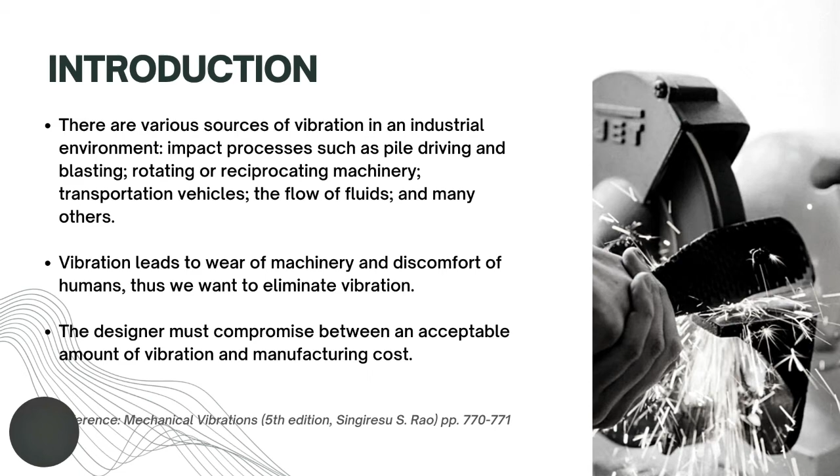Vibration analysis and control is the design or modification of a system to suppress unwanted vibrations and to reduce force or motion transmission. So ito yung pagdi-design or pagmamodifika ng system upang mabawasan or ma-dissipate yung mga vibrations and mabawasan yung mga outside or external forces and motion transmission.

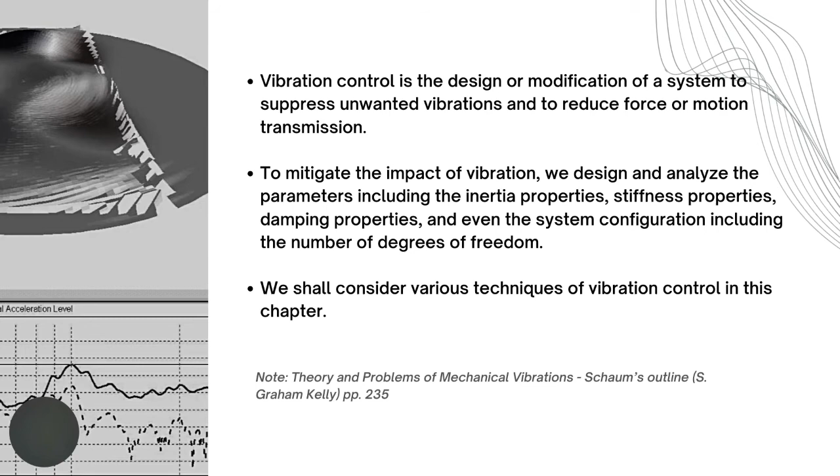To mitigate the impact of vibration, we design and analyze the parameters, including the inertia properties, stiffness properties, damping properties, and even the system configuration, including the number of degrees of freedom. So, in this chapter, we shall consider various techniques of vibration control.

Vibration nomograph and vibration criteria. So, when we say nomograph, it is the diagram representing the relations between 3 or more variable quantities by means of a number of scales. So, the vibration nomograph displays the variation of displacement, velocity, and acceleration amplitudes with respect to the frequency of the vibration.

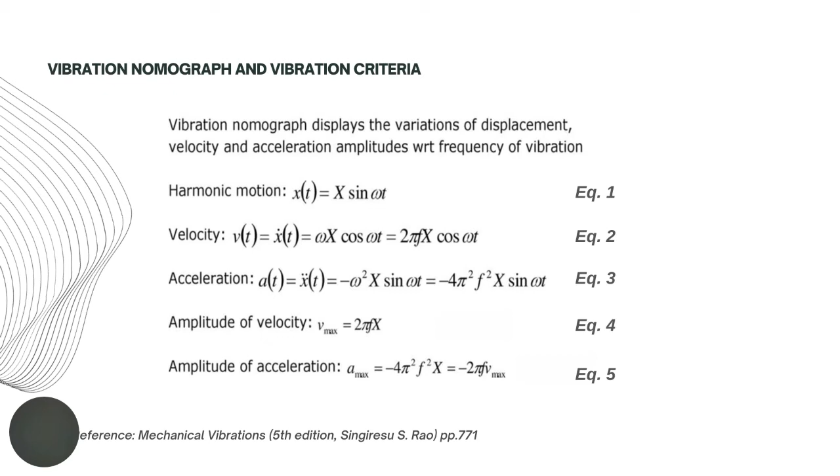So, here we have the harmonic motion, equation 1, the velocity, equation 2, the formula for acceleration, equation 3, and the equation for the amplitude of velocity, Vmax equals 2 pi times frequency times the amplitude. And the equation for the amplitude of acceleration, Amax equals negative 2 pi times frequency times Vmax.

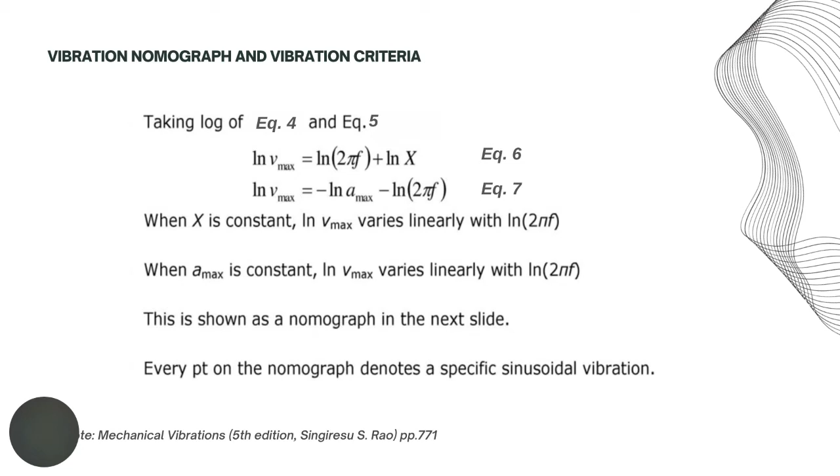Taking the logarithm of equation 4 and equation 5 by the use of the quotient rule and product rule, we can obtain equation 6 and equation 7. From that, when x is constant, ln Vmax varies linearly with ln 2 pi f. Same lang sa amplitude of acceleration. Kapag constant siya, ln Vmax still varies linearly with ln 2 pi f. This is shown as a nomograph in the next slide. And thus, every point on the nomograph denotes a specific sinusoidal vibration.

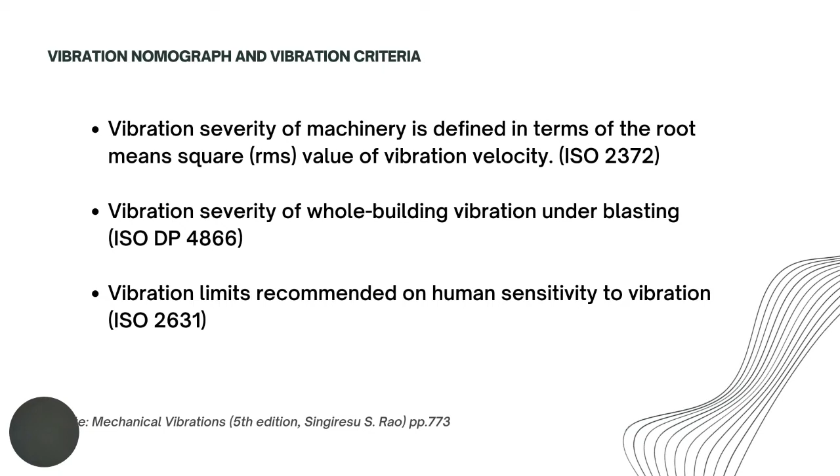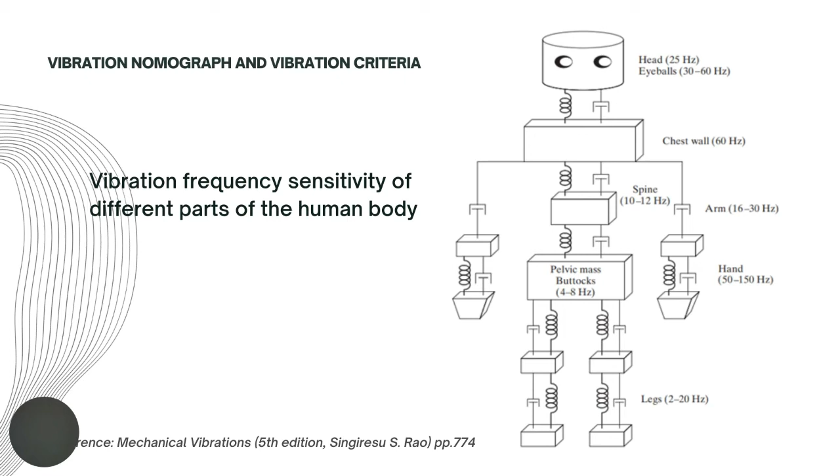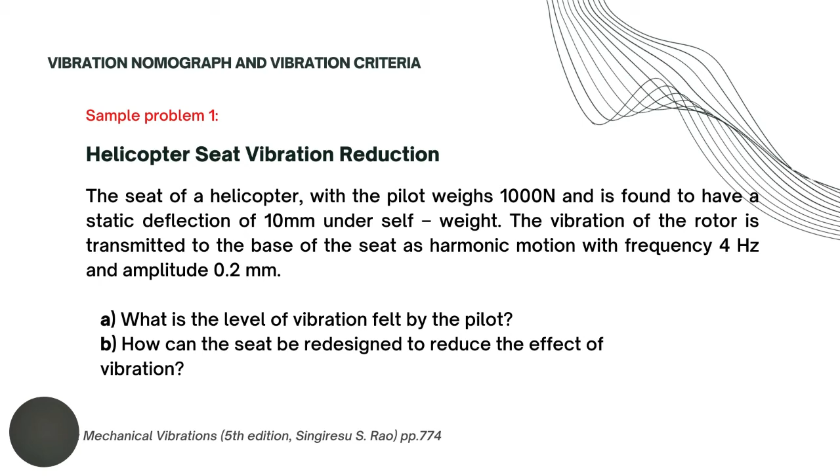So we have a sample problem here, helicopter seat vibration reduction. The seat of a helicopter with the pilot weighs 1,000 Newton and it is found to have a static deflection of 10 mm under self-weight. The vibration of the rotor is transmitted to the base of the seat as harmonic motion with frequency 4 Hz and amplitude of 0.2 mm. So we need to determine what is the level of vibration felt by the pilot and how can the seat be redesigned to reduce the effect of vibration.

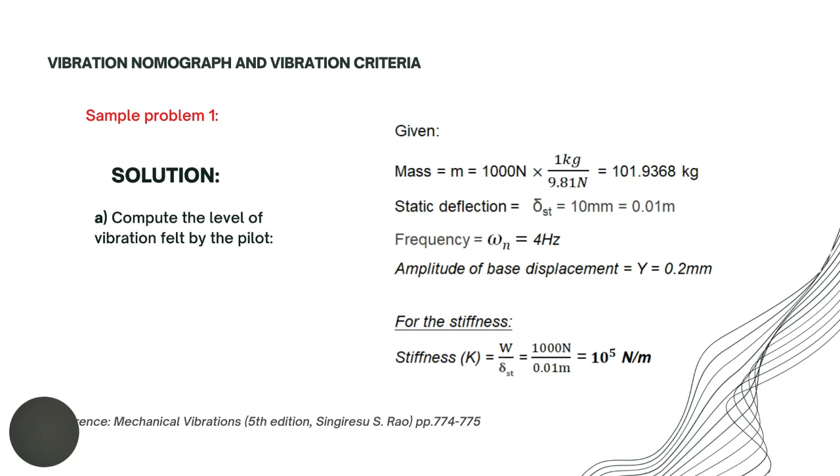So first, for the computation of the level of vibration felt by the pilot, we list the given. We have the mass, static deflection, frequency, amplitude of base displacement, and we compute for the stiffness using this formula, and we get 10 raised to 5 Newton per meter. And for the natural frequency, we use this formula, the square root of k, or stiffness, divided by m, divided by 2 pi. So substitute, then manipulation of units, we obtain 4.9849 cycles per second, or hertz.

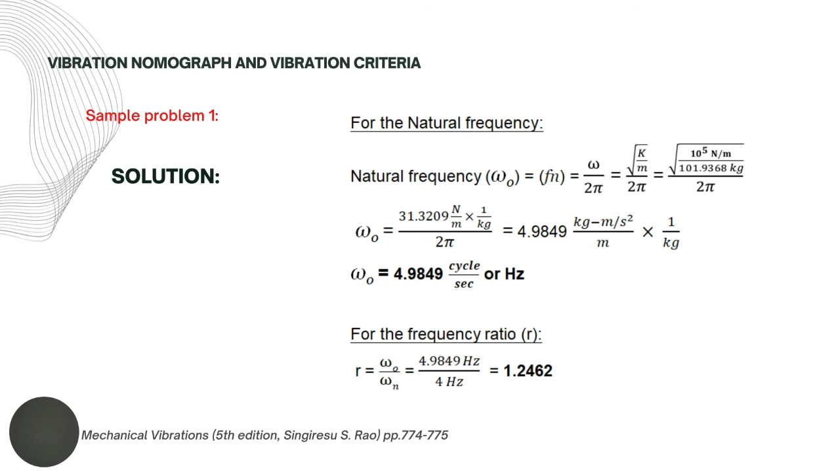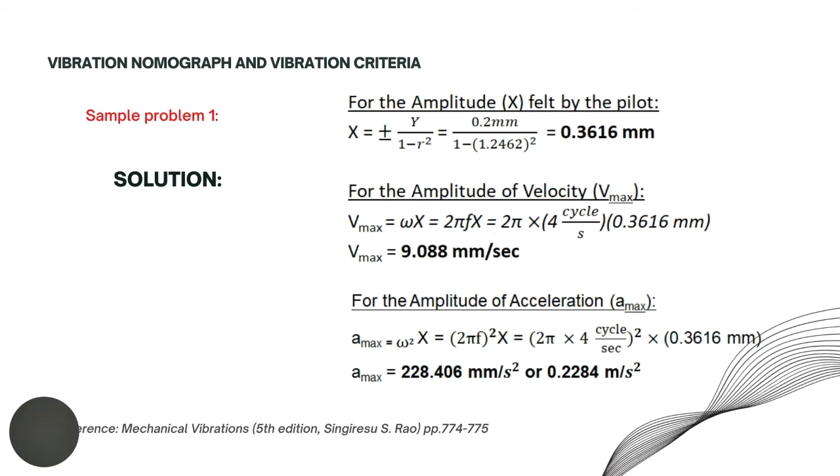And for the frequency ratio, we just divide the natural frequency over the excitation frequency, and we get 1.2462. So for the amplitude felt by the pilot, we use this formula, and we obtain 0.3616 millimeter. For the amplitude of velocity, we use the formula I tackled a while ago, and obtain 9.088 millimeter per second. And for the amplitude of acceleration, we use the formula 2 pi f squared times the amplitude, so we get 0.2284 meter per second squared.

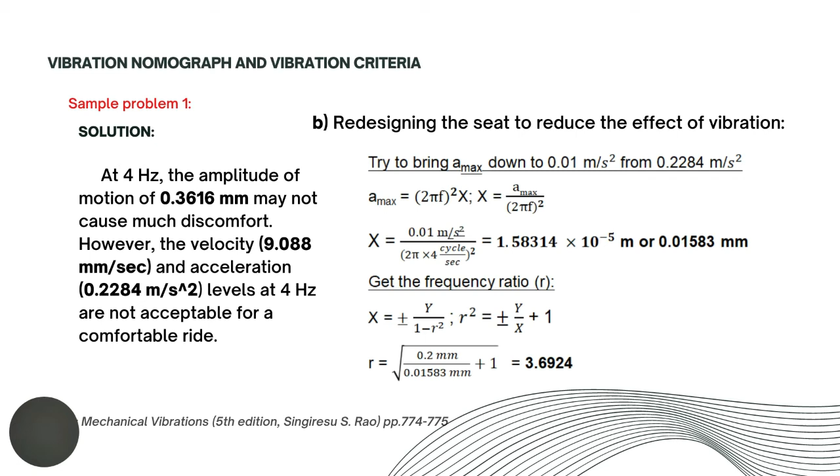So from that, we compute for the new amplitude. We get 0.01583 millimeter. Then get the frequency ratio. So we solve 3.6924. And for that, we can now solve for the new frequency of the seat using this formula. Then we solve for 6.8066 rad per second. For that, we can solve for the stiffness. K is equal to natural frequency squared times mass.

Then we obtain 4,772.71 Newton per meter. So therefore, this implies that the stiffness of the seat needs to be reduced from 10 raised to 5 Newton per meter to about 4,772 Newton per meter. Diba? Ang laki ng pagitan nila. To be acceptable for a comfortable ride, by using a softer material or by using a different spring design.

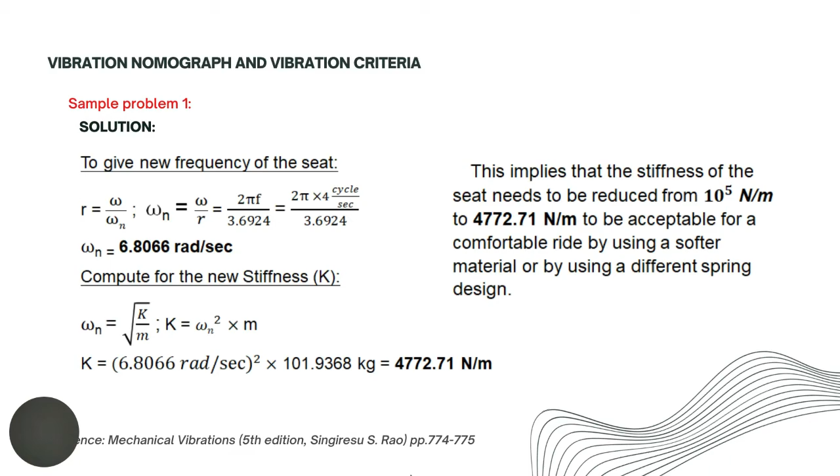Reduction of vibration at the source. The first thing you need to do to control vibration is to try to alter the source so that it produces less vibration. So, syempre, sa unang-una, kailangan mo malaman yung source ng vibration. Kung saan siya nanggagaling, kung saan nag-umpisa. In order for you to fix it or to alter it.

Some examples of the sources of vibration that cannot be altered are the earthquake excitation, atmospheric turbulence, road roughness, and engine combustion instability. So, ayun yung mga sources ng vibration na hindi mo kaya ma-alter dahil it's either ito'y unexpected na galing sa Mother Nature or yung mga bagay na hindi mo control like the engine combustion instability.

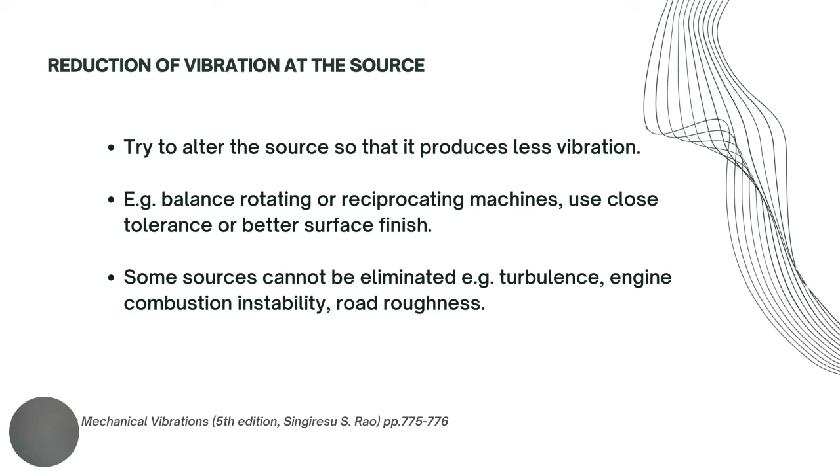On the other hand, certain sources such as unbalance in rotating or reciprocating machines can be altered to reduce the vibrations. And this can be achieved usually by using either internal balancing or an increase in the precision of machine elements. The use of close tolerances and better surface finish for machine parts which have relative motion with respect to one another.

Whirling of rotating shafts. What is whirling? Whirling is defined as the rotation of the plane made by the line of centers of the bearings and the bent shaft. In many applications, a heavy rotor is mounted on a light, flexible shaft supported in bearings. Unbalances and other effects will cause a shaft to bend at a certain speed known as whirling speeds. There will be unbalance in all rotors due to the manufacturing errors.

So, these unbalances as well as other effects such as the stiffness, yung damping of the shaft, gyroscopic effect, and even fluid friction in bearings will cause a shaft to bend in a complicated manner at certain rotational speeds known as whirling. According to S. Graham Kelly, whirling is a phenomenon that occurs when the center of mass of a rotor attached to a rotating shaft is not aligned with the axis of the shaft. So, yung whirling nga daw is yung kapag yung center of mass ng rotor mo ay hindi naka-align sa axis of the shaft.

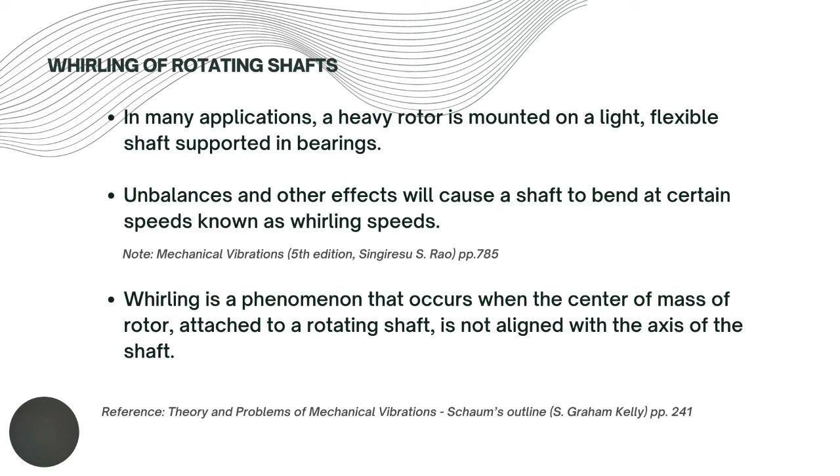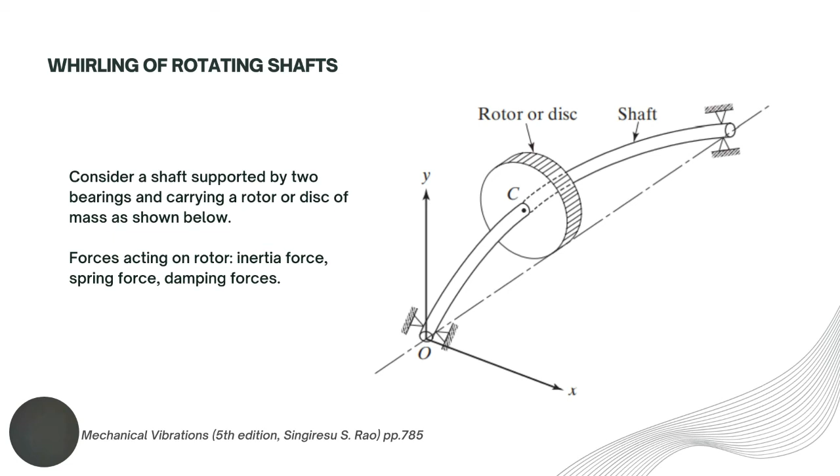So, equation of motion. We have here a figure of a rotor with eccentricity. As you can see here, we have a y and x axis, and let O be the equilibrium position of the shaft when balanced perfectly. So, ito yung equilibrium position natin kapag nakabalance talaga yung shaft. And the line OC here, ito yung distance, the rotor deflects radially by distance OC. So ito yung distansya ng pag-deflect ng rotor kapag nagkakaroon ng whirling.

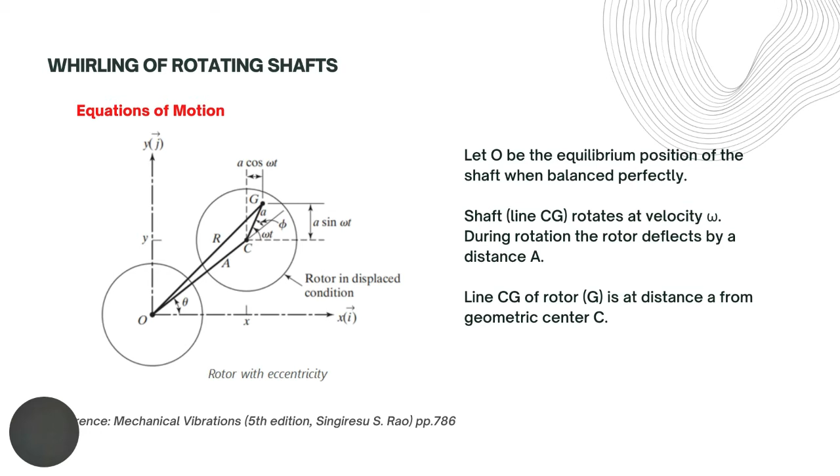And the line CG is assumed to rotate with a constant angular velocity. Ayun yung line CG. And we have here a, that stands for eccentricity, G, the center of gravity, mass center of rotor, C, geometric center of rotor, and A, the whirl amplitude. From this figure, we can formulate the equation of motion. The angular velocity of line OC, theta dot equals d theta over dt, is known as the whirling speed. And it is in general not equal to the rotational speed of the shaft.

The equation of motion of the rotor can be written as, so ito, yung equation natin ng inertia force, Fi, is equal to elastic force, Fe, plus internal damping force, FDI, plus external damping force, FDE. And also we can write the formula of inertia force as Fi equals mass times R double dot, where R is the radius vector. And in equation 2, we have the formula for the radius vector R.

And for equation 3, we have the inertia force, which is equal to mass times the value of R here. In equation 4, it is the elastic force formula, which is minus K multiplied by X times i plus Y times j, where K is the stiffness of the shaft. In equation 5, it is the internal damping force, where Ci is the internal rotary damping coefficient, and equation 6 is the external damping force, where C is the external damping coefficient.

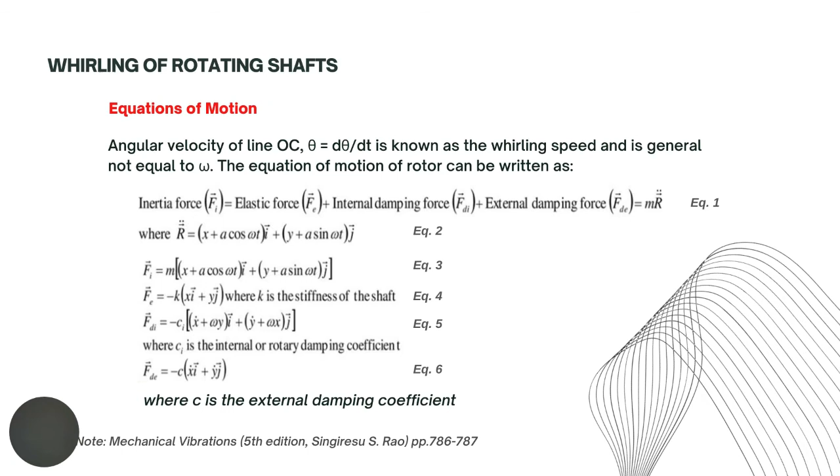So if we substitute the inertia force, the elastic force, the internal damping force, and the external damping force into equation 1, we can obtain equation 7 and equation 8. These equations of motion, which describe the lateral vibration of the rotor, are coupled and are dependent on the speed of the steady state rotation of the shaft. By defining the complex quantity W as W equals X plus i times Y, where i is equal to negative 1 raised to the power of one half, if we get the sum of equations 7 and 8 and multiply by i, we can obtain the single equation, equation 9.

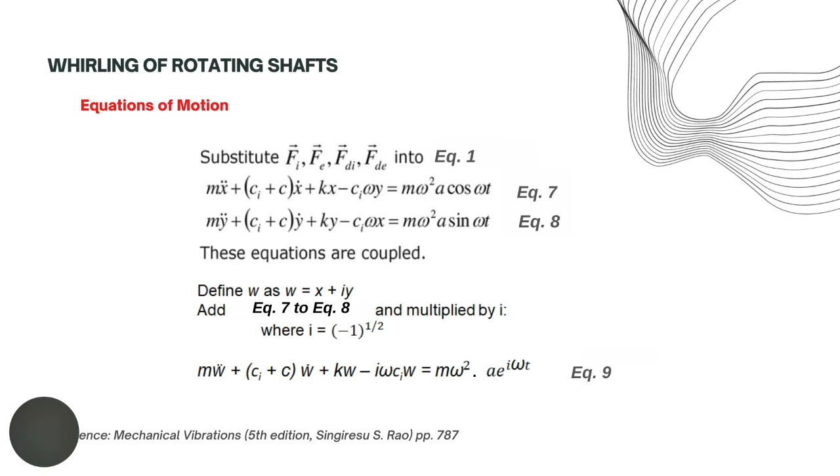Critical speeds. A critical speed is said to exist when the frequency of the rotation of the shaft equals one of the natural frequencies of the shaft.

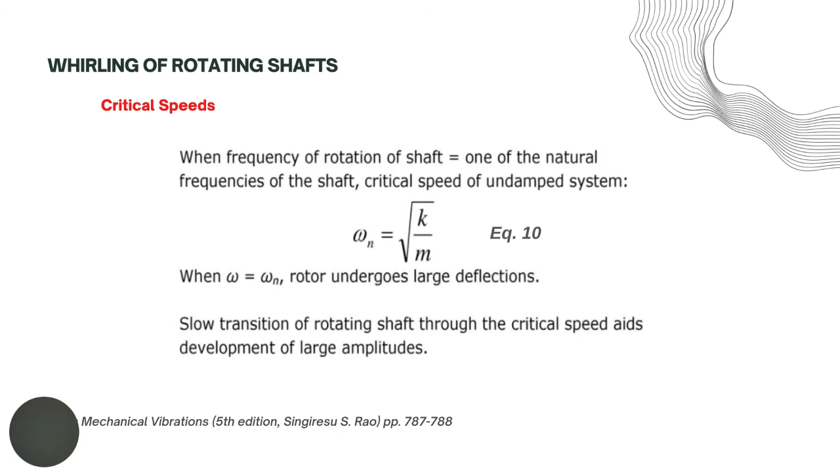Response of the system. To determine the response of the rotor, we assume the excitation to be a harmonic force due to the unbalance of the rotor. So to get the equation of the response of the system, we solve equation 9 and find the rotor's dynamic whirl amplitude resulting from the mass unbalance. So we assume that Ci, the internal damping coefficient, is 0, and then substitute 0 in equation 9. So the equation reduces to equation 11.

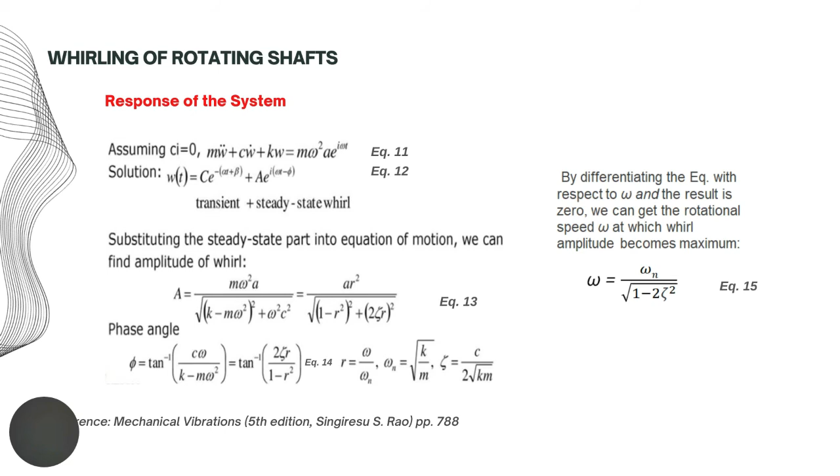So we have here the sample problem number 2, the whirl amplitude of a shaft carrying an unbalanced rotor. So, let's start. A shaft carrying a rotor of mass 50 kg and eccentricity of 2 mm rotates at 1,200 rpm. Determine A, the steady state whirl amplitude, and B, the maximum whirl amplitude during startup condition of the system. Assume that the stiffness of the shaft is 40 meganewton per meter and the external damping ratio is

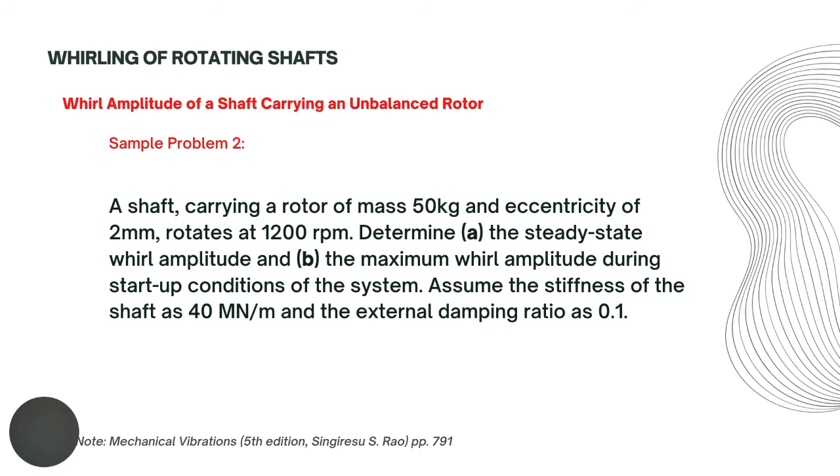0.1. So first, we need to list the given. We have the mass, the eccentricity of 2 mm, the speed of 1,200 rpm, stiffness, and the damping ratio. So to compute for the steady state whirl amplitude, first we need to compute the forcing frequency or the rotational speed of the shaft by using the formula 2 pi n divided by 60. We get 125.6637 rad per second.

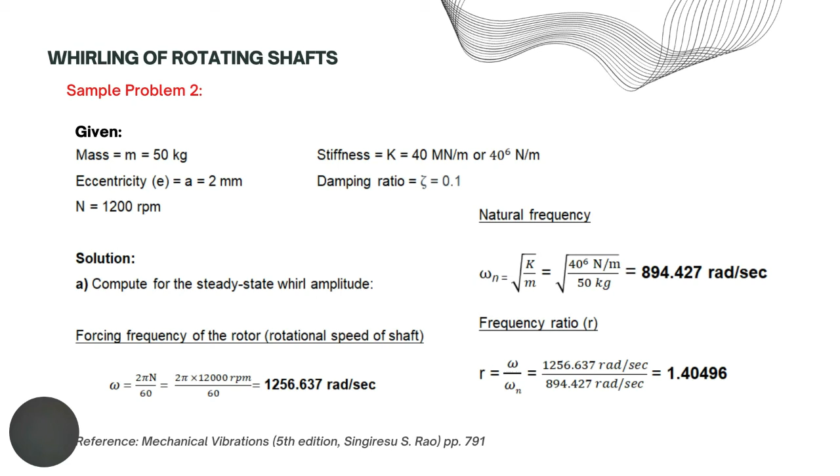And to solve for the natural frequency, as usual, we use the formula of the natural frequency, and we obtain 894.427 rad per second. And for the frequency ratio, we only divide the rotational speed by the natural frequency, and we obtain 1.40496. So now for the steady state whirl amplitude, we need to use the formula that I've been discussing a while ago. So substitute the value of the eccentricity, the frequency ratio, and damping ratio. From that, we get 3.895 millimeters for the whirl amplitude.

So now, we solve for the amplitude during startup condition. The ω, or the rotational speed of the rotor, passes through the natural frequency. Using the frequency ratio of 1, we obtain the whirl amplitude by using this formula, eccentricity divided by 2 times damping ratio. So we get 0.01 meter or 10 millimeters.

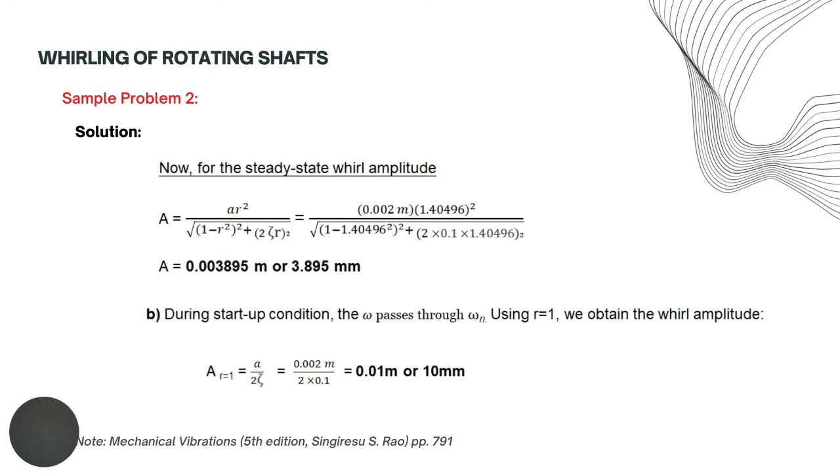Control of vibration. In many practical situations, it is possible to reduce but not totally eliminate the dynamic forces that cause vibrations. Several methods can be used to control vibrations. So these are the methods to control vibration. First, controlling the natural frequencies of the system and avoiding resonance. As we all know, when the frequency of the excitation coincides with the natural frequency of the system, the response will be very large, and this is called resonance. This condition needs to be avoided to prevent the failure of the system.

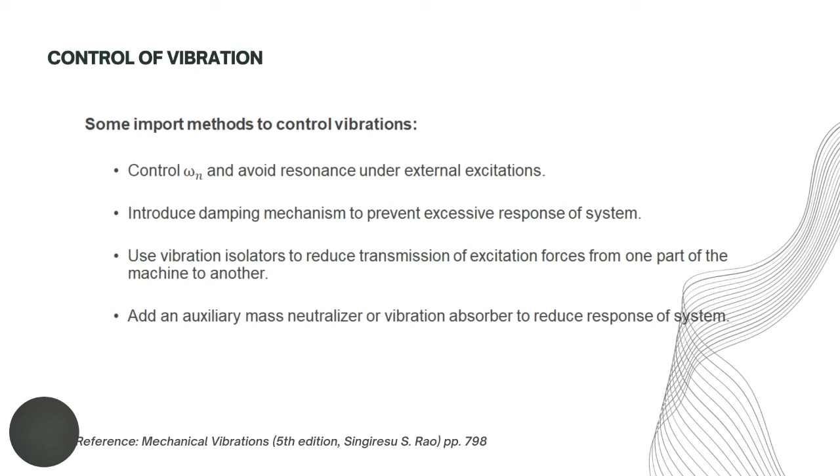Second, by using a damping or energy dissipating mechanism, we can prevent the excessive response of the system, even at resonance. Another method to control vibration is to reduce the transmission of the excitation forces from one part of the machine to another by the use of vibration isolators. Last, by reducing the response of the system by the addition of an auxiliary mass neutralizer or vibration absorber, which we will discuss later.

Vibration isolation. What is vibration isolation? It is the procedure by which the undesirable effects of vibration are reduced, basically by insertion of a resilient member or isolator between the vibrating mass and the source of vibration, so that a reduction in the dynamic response of the system is achieved under specified conditions of vibration excitation. An isolation system is said to be active or passive. So we have two types, the passive isolator and the active isolator.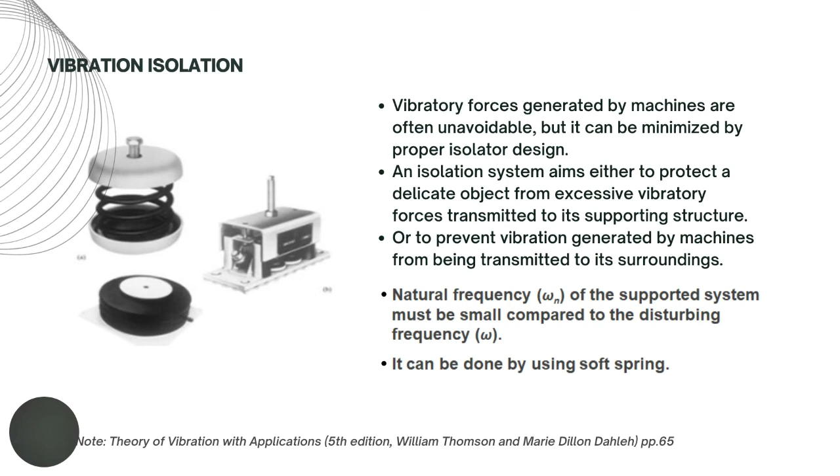An isolation system aims either to protect a delicate object from excessive vibratory forces transmitted to its supporting structure, or to prevent vibration generated by machines from being transmitted to its surroundings. The very aim of an isolation system is that the natural frequency of the supported system must be small compared to the disturbing frequency in order to avoid resonance or excessive vibration. And it can be done by using a soft spring.

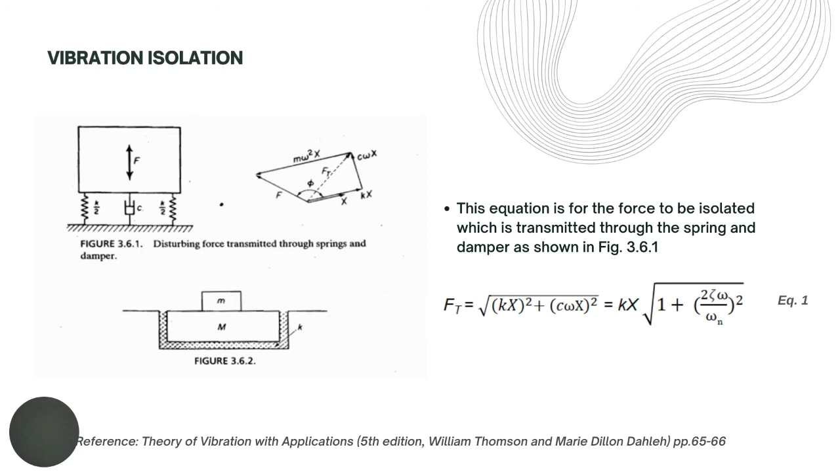As shown in figure 3.6.1, its equation is: the transmitted force equals the stiffness K times the amplitude, multiplied by the square root of 1 plus the quantity of 2 times the damping ratio times the disturbing frequency over the natural frequency squared. This is equation number 1.

The disturbing force is equal to the disturbing force times sine times the disturbing frequency times the time. Equation 2 is the equation for the amplitude, and the TR or the transmissibility is the ratio of the transmitted force to the disturbing force.

So our TR is unitless because it's just a ratio. It is the ratio of FT over FO. That is our equation 3.

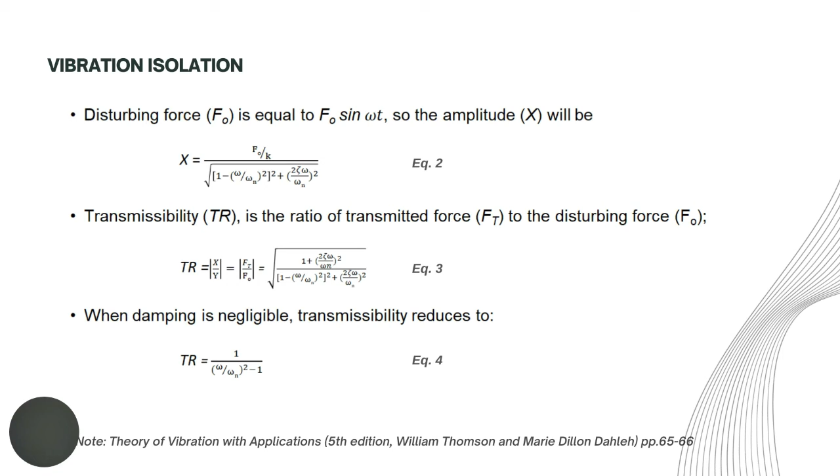When damping is negligible or zero, the TR reduces to 1 over the quantity of disturbing frequency over natural frequency squared, minus 1. This is our equation number 4.

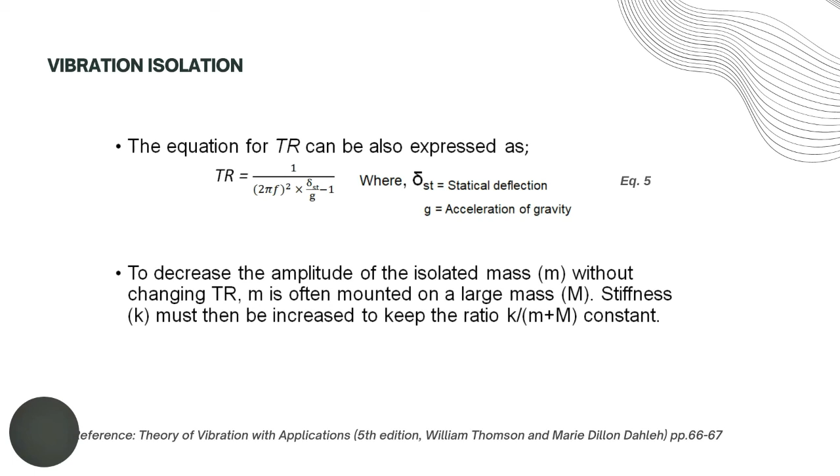The equation of TR can also be expressed as equation number 5, wherein it has the statical deflection and acceleration of gravity. To decrease the amplitude of the isolated mass without changing the TR, the smaller mass is often mounted on a large mass. Stiffness must then be increased to keep the ratio K over M plus M constant.

Isolation of source of vibration from surroundings. Here we have TR equals 1 over frequency ratio squared minus 1. The frequency ratio is always greater than the square root of 2. In vibration isolation, the damping ratio should always be low for a better system.

By defining the frequency ratio as equal to the disturbing frequency divided by natural frequency, we have 2 pi n over 60 multiplied by the reciprocal of the formula of natural frequency. Then we have the square root of 2 minus r over 1 minus r, where r equals 1 minus TR.

Substitute the values and manipulate the units and the formula, and we get 29.9092 multiplied by the square root of 2 minus r over the statical deflection multiplied by the quantity of 1 minus r. This is our formula.

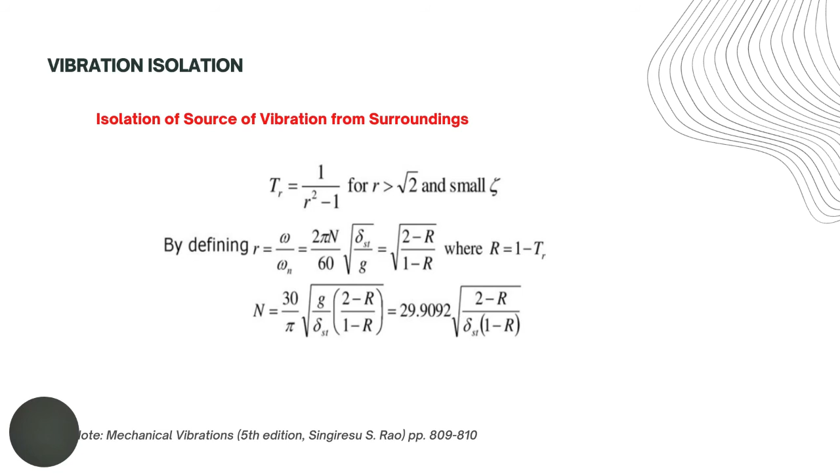So we have here sample problem number 3. A machine of 100 kg mass is supported on springs of total stiffness of 700 kilonewton per meter and has an unbalanced rotating element, which results in a disturbing force of 350 Newton at a speed of 3000 rpm.

Assuming a damping factor of 0.20, determine the amplitude of motion due to the unbalance, the transmissibility, and finally the transmitted force. First we need to list the given: the mass, the stiffness, the disturbing force which is 350 Newton, the speed or 3000 RPM, and the damping ratio which is 0.20.

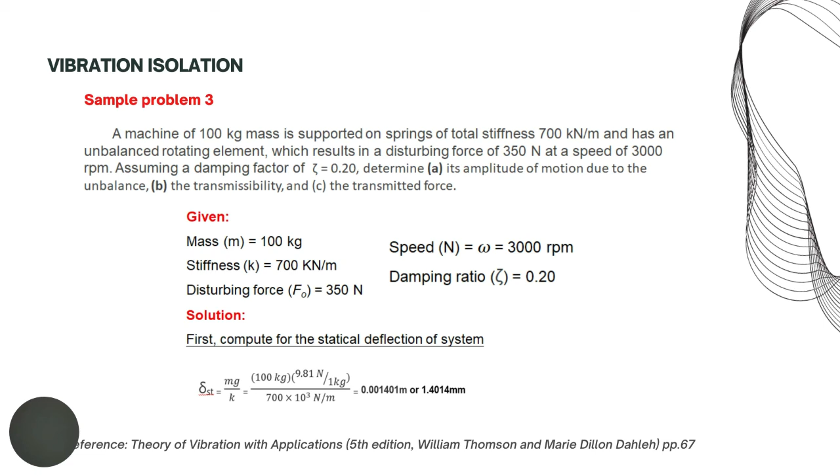First, we compute the statical deflection of the system. We use the formula of mass times gravitational acceleration divided by the stiffness. Substituting the values and cancelling the units that need to be cancelled, we get 1.4014 millimeter. For the natural frequency, we use its formula, substitute the values, then compute, and we get 13.32 cycles per second, or hertz.

For computation of the amplitude of motion, we use equation number 2 discussed a while ago. We substitute the values and cancel the units, then we have the amplitude of 0.0379 millimeter.

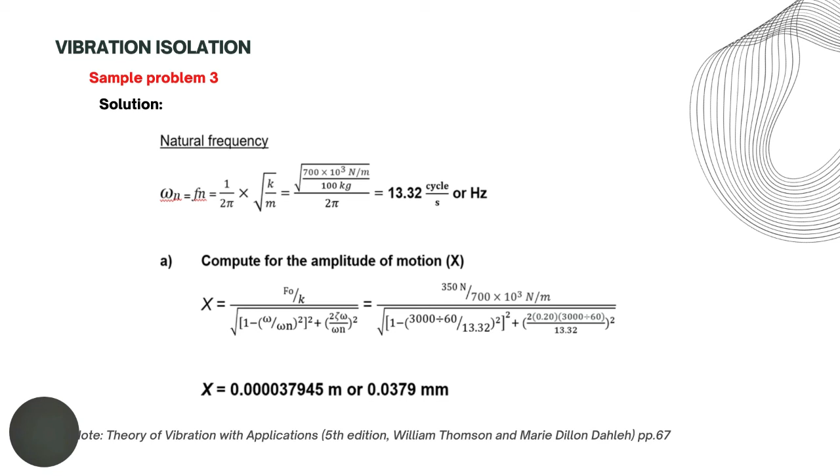For the TR, it equals the transmitted force divided by the disturbing force, or TR can also be written as the square root of 1 plus the quantity of 2 times the damping ratio times the disturbing frequency divided by the natural frequency, squared, divided by the quantity 1 minus the disturbing frequency divided by natural frequency squared, to the power of 2, plus the quantity of 2 times the damping ratio times the frequency ratio, squared.

Substitute the values and cancel the units that need to be cancelled, and we get a transmissibility of 0.1369, which is unitless.

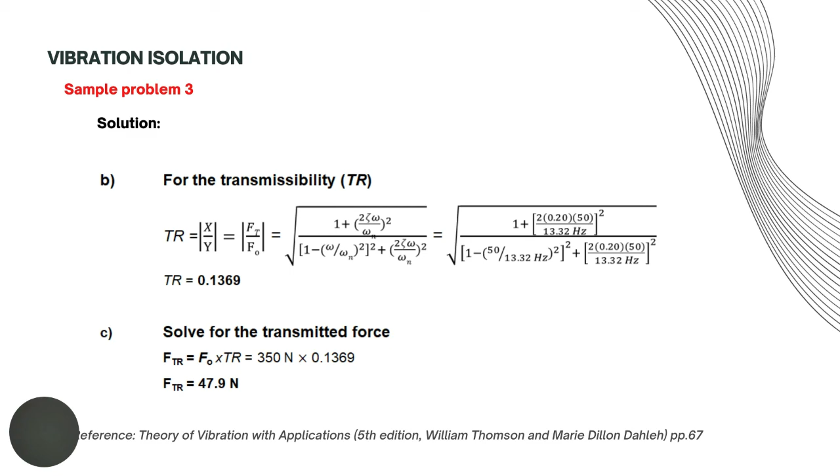Finally, for the computation of the transmitted force, we use the formula Ft over Fo. Manipulating the units and formula, we have 350 Newton times 0.1369, so we obtain a transmitted force of 47.9 Newton.

Vibration absorbers, also called dynamic vibration absorbers, are mechanical devices used to reduce or eliminate unwanted vibration. It consists of another mass and stiffness attached to the main mass that needs to be protected from vibration.

The vibration absorber is commonly used in machinery that operates at constant speed because it is tuned to one particular frequency and is effective only over a narrow band of frequencies. Common applications include reciprocating tools like sanders, saws, and compactors, and large reciprocating internal combustion engines, which run at constant speed for minimum fuel consumption.

Vibration absorbers are also used on high voltage transmission lines to mitigate the fatigue effects of wind-induced vibration. When the excitation frequency coincides with the natural frequency, the system may experience excessive vibration, or resonance. In such cases, the vibration of a machine can be reduced by using a vibration neutralizer or vibration absorber, which is simply another spring mass system. The dynamic vibration absorber is designed such that the natural frequencies of the resulting system are away from the excitation frequency.

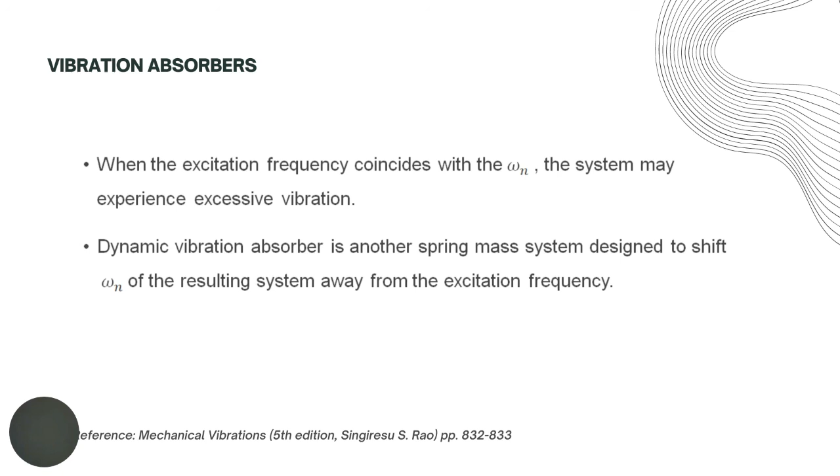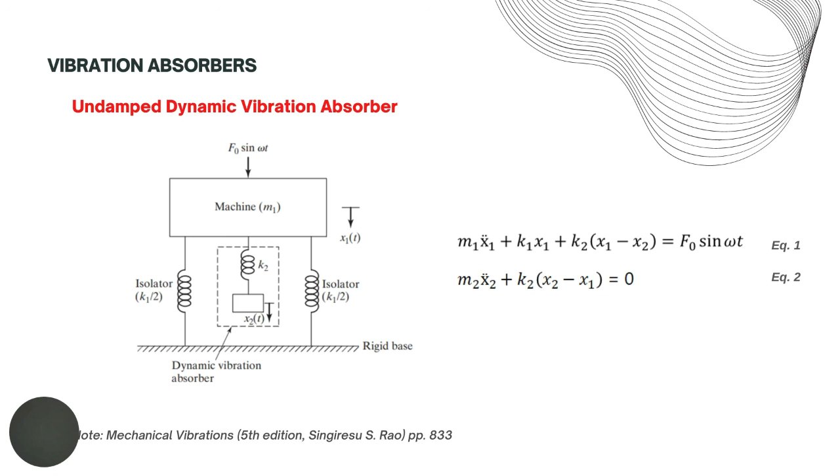So here we have a figure, the undamped dynamic vibration absorber. When we attach an auxiliary mass M2 to a machine of mass M1 through a spring of stiffness K2, the resulting 2 degree of freedom system will look like this figure. From this, we have equation 1 and equation number 2.

By assuming the harmonic solution, we have x sub j with respect to time is equal to X sub j, the amplitude sub j, times sine multiplied by the frequency multiplied by time, where j is equal to 1, 2. From this,

We are primarily interested in reducing the amplitude of the machine, x sub 1. In order to make the amplitude of M1 equal to 0, the numerator of the equation should be set equal to 0. So we have the disturbing frequency squared equal to stiffness 2 divided by mass 2, and the disturbing frequency squared is approximately equal to the disturbing frequency sub 1 squared, equal to stiffness 1 divided by mass 1.

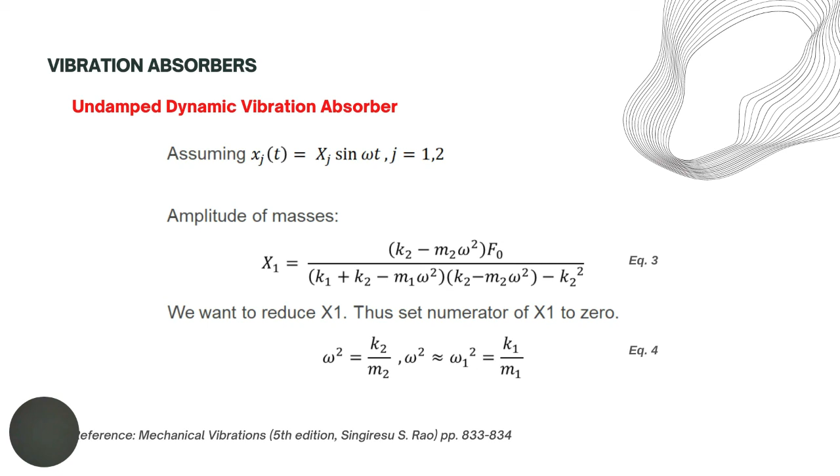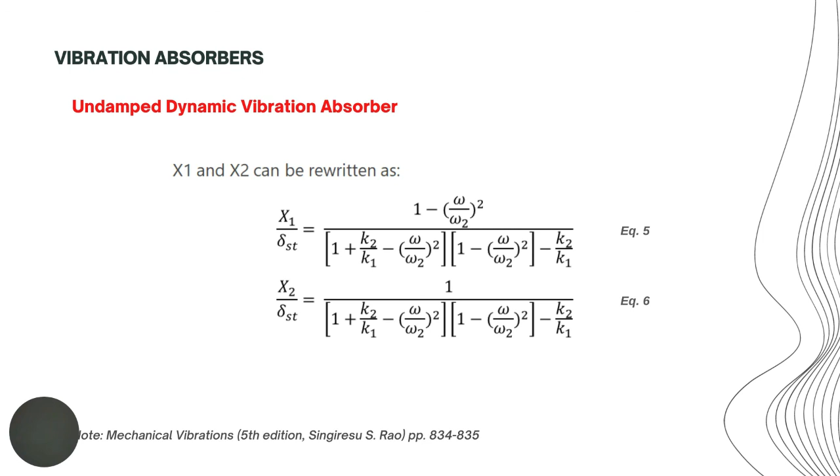From equation 4, we can obtain x1, or the amplitude 1, and the amplitude 2, giving us equation 5 and equation 6. So we have the last sample problem here.

A diesel engine weighing 3,000 Newton is supported on a pedestal mount. It has been observed that the engine induces vibration into the surrounding area through its pedestal at an operating speed of 6,000 rpm. Determine the parameters of the vibration absorber that will reduce the vibration when mounted on the pedestal. The magnitude of the exciting force is 250 Newton, and the amplitude of motion of the auxiliary mass is to be limited to 2 mm.

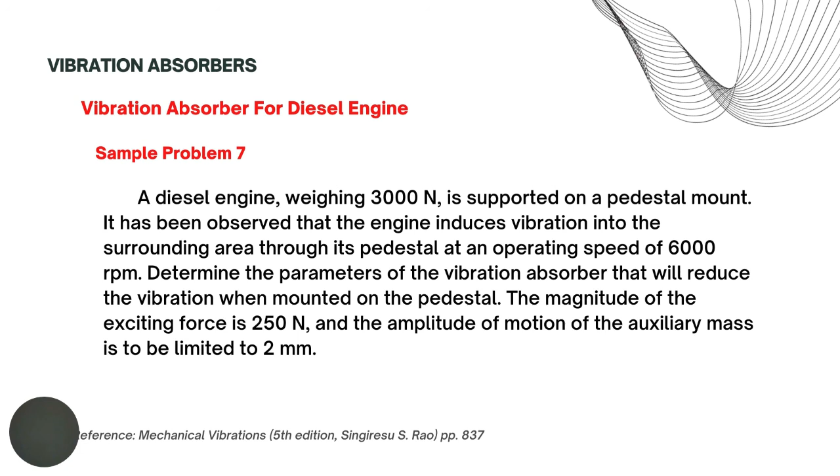So we solve it. We have a frequency of 6,000. Divide it by 60, you get 100 RPS or 100 Hertz. We know that in 1 Hertz, we have 6.28 radians per second. Converting it, we get the frequency of 628.32 radians per second.

Given here, we have 250 Newton for the exciting force, an amplitude of 2 millimeters, and the weight of the engine at 3,000 Newton. Since the motion of the pedestal is to be made equal to 0, the amplitude of motion of the auxiliary mass should be equal and opposite to that of the exciting force.

So, by using the formula for exciting force, F sub O equals the second mass multiplied by the disturbing frequency squared, multiplied by amplitude 2. Then we substitute the values, calculate it, and we can calculate the second mass, which is equal to 0.31665 kilogram.